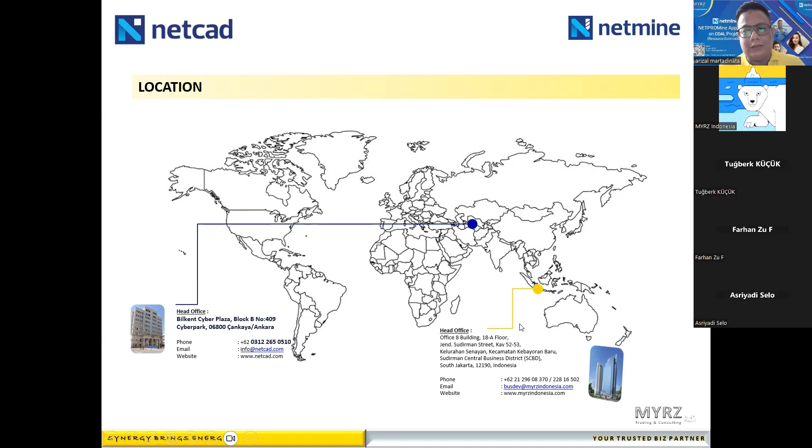Hello Tuğberk, can you say hello to participant? Sure, hi everyone, good morning. Yeah, morning. And then Khatijah.

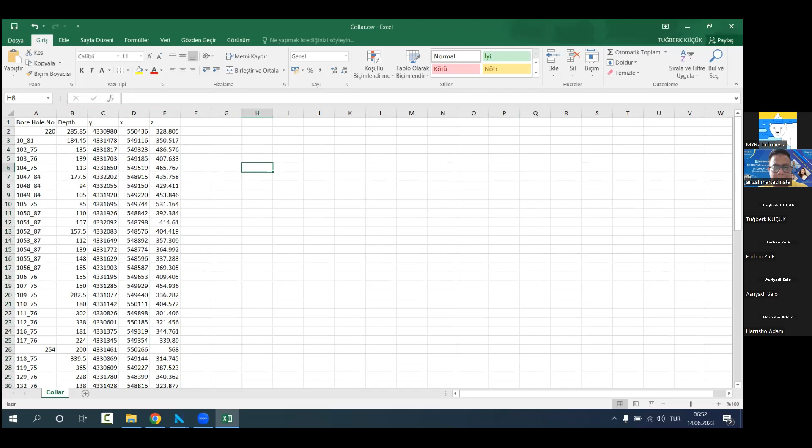First of all, the first step, the first layer that we have is borehole data. So we need to bring our borehole data. In the collar information, basically what we require is the name or number of the borehole, the depth information, and XYZ coordinates. So first, we are reading that information from a CSV file.

Okay, seems like it's matching correctly. If it didn't match, you can just select the proper field to make it match. So once we apply, we are going to create the borehole data.

We are going to bring the boreholes in here, and you can also see under the borehole data, now we have 66 boreholes, and we created their information card, let's say, the borehole information card. We are going to fill the rest of the information once we proceed, like lithology information, the angle information, and the raw sample information later on.

For the second thing, we are going to read the survey or angle information. According to the borehole name, we have dip and azimuth information, which shows those boreholes are vertical ones, so we don't have any different angle, but still we can read that file. Here it should match with the dip, and here it should match with the azimuth information. Okay, we applied.

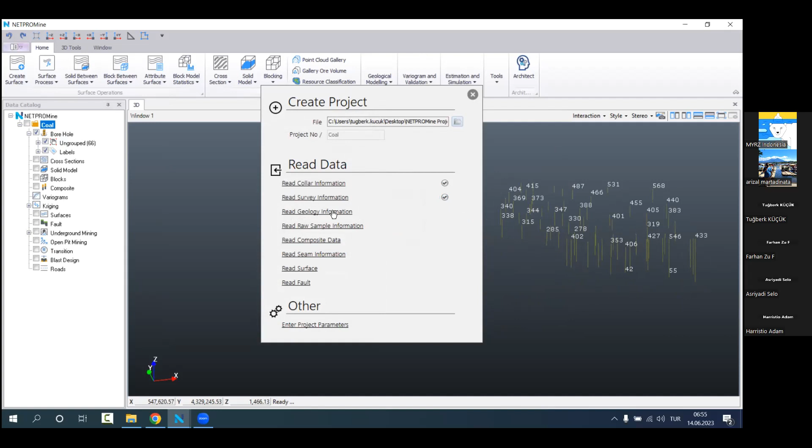In the meantime, you can understand that if the software accepts your information, it's going to be checked; otherwise, you might see some differences. There are two options basically: first, you can get a notification saying that information is not correct, etc. So you're going to get a note saying that there is something wrong. In that sample file, we are not going to have that issue.

For the borehole lithologies, we are repeating the name or number of the borehole, and according to the depth information, we have different lithologies. For example, it says in between 0 to 9.6 meters we have this lithology, and in between 9.6 to 10.3 we have KM3 lithology. So it goes to the end of the borehole, which is the final depth, and going there we have lots of different lithologies.

So now we are going to read or import that information. It's matching correctly, and we are going to apply.

Okay, so now we do have geology information too. In the raw sample information, once you click it, the software will tell you that you need to enter the attribute information, which is analyze information. You can go there, go into the project parameters, and type some attributes that we are going to work on.

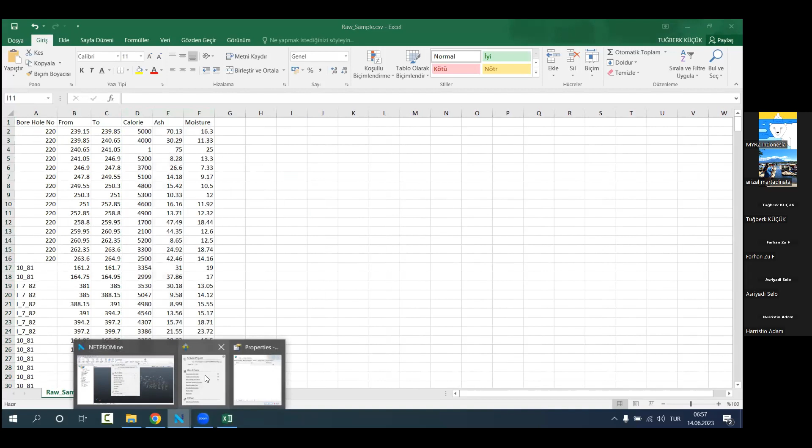So therefore, let's go to the properties. In the attributes, I will say calorie information, ash, and moisture information that I'm going to bring into the software. As a unit, I will select calorie. For ash and moisture, what I have is percentage information, percentage of ash and percentage of moisture. And I will click OK.

So now when you click read raw sample information, the software will allow you to match the information, from and to, and now calorie should match with the calorie, ash, and moisture. Okay, when we apply, we are going to bring that information into the software, and also into each borehole's information card, for example this one.

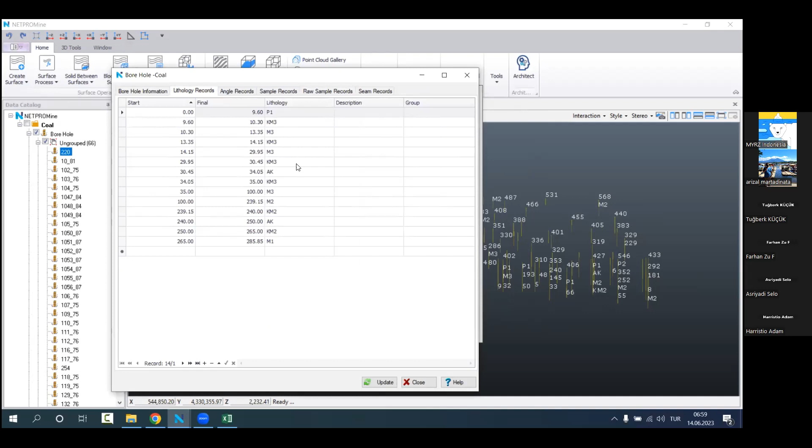In the raw sample section, you can see the calorie, ash, moisture part. In the lithology, you can see all of the different lithologies and the angle records. For hole dip, we do have -90, so we are quite aware of that. All right, so these four pieces of information are quite enough for starting a project.

If we have separate seam information, we can also read the seam information too. It's quite similar to lithology. Whenever we have seam level in between some depths, we can also bring that information into the software. So instead of lithology, maybe you can also use the seam, and you can see the seam information. Seam or vein, maybe you're familiar with the vein information.

All right, now we do have the borehole, so I would like to manage that data. A lot of different labels are on at the moment, so I will just leave the borehole number.

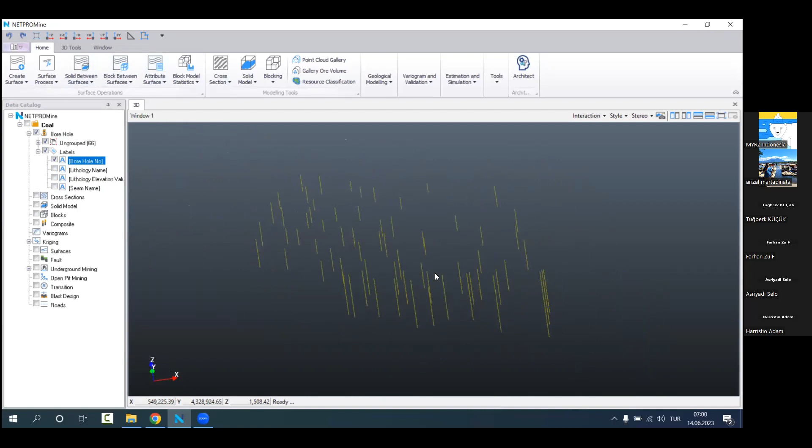Then the second thing, boreholes are looking a little bit thin, so I will change the diameter of the boreholes. From options, 3D settings, as a cylinder diameter, I will use 15. Visually, it will help me to see the boreholes thicker.

All right, the next thing I would like to do, let's go to the properties of the project, go to the lithology colors. Now I would like to differentiate the lithologies by assigning them different colors. In the meantime, the lithology that contains coal is this one.

Okay, KM2. So usually I make the lithology that I'm going to work on red. If you do that, basically you're going to see the levels that most likely contain coal. That red level contains coal information for me, but let's also give other colors to the other lithologies as well. So I will give light colors to the other lithologies, so it's not a problem to separate the red lithology from the others.

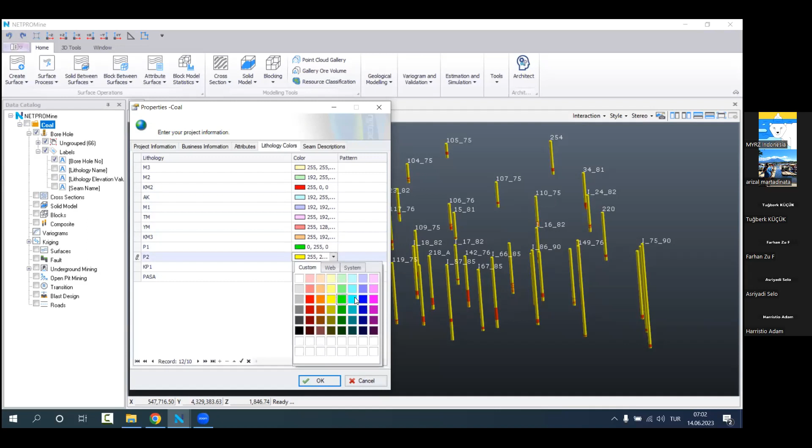Maybe like that. All right, the red one we can still see, or usually light colors. So this is helping me to understand what kind of lithologies I have at the moment.

And if I want, I can make some adjustments. For example, I can edit the borehole number label here. I can change its color. I can make it bold.

Or I can bring some new labels. Go into the label, add a label for numeric calorie information, for example. And again, let's make it like that.

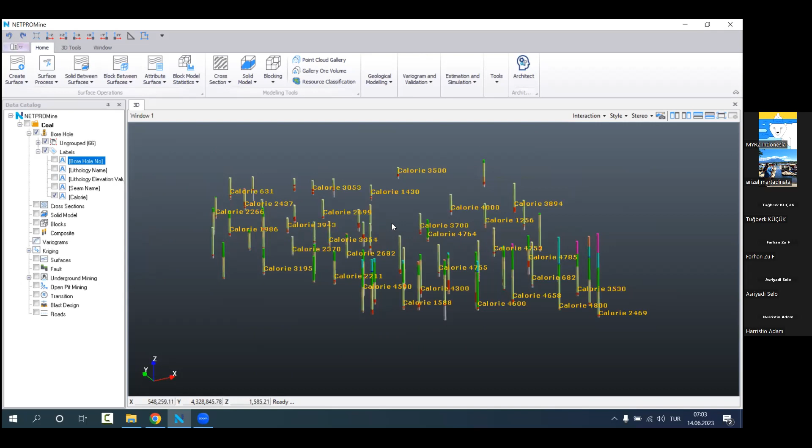So now, in different levels, I do have different calorie information as a label. So when we bring that calorie information as a label, it's quite hard to understand what we have as calorie and how the distribution looks like.

Therefore, we do have the raw sample displaying feature. In the raw sample display, you can select the attributes and make that attribute visible in some sort of a legend. And look, even if I close the boreholes, now I can see the levels that I do have, the calorie and different calorie information also.

So you might say that intervals don't tell me anything. I mean, why did we separate that in between 0 to 1369? Basically, the software just directly creates a legend in between minimum to maximum information. So our maximum calorie information is probably this one, 5,479. The software just splits that information into 4 pieces.

But I can go to the thematic part. I can edit by using a new numeric range, so the slot spaces are going to be user defined.

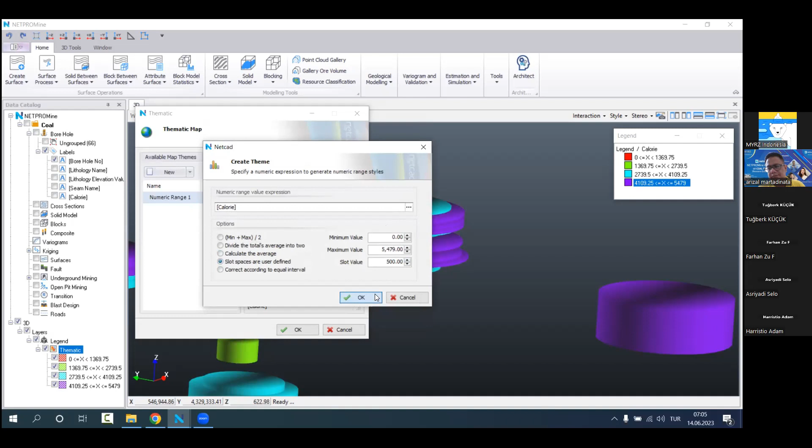I will select the calorie information now, and according to that information, I'm going to define the slot values. It can start from 0 minimum value, but I would like to select 500 as a slot value, so it's going to separate that information into 11 pieces.

Now, the pinky color is the highest calorie that we have, and the purple one is quite high. I can get some understanding of the levels. I have high calorie content in this region, and low quality material here usually. So it's in between 1500 to 2500 over here, and in here it's like in between 4000 to 5000. So this is the information that I have.

Let's turn back to the boreholes. What other statistical information I can get from the software is one of them. By right-clicking on the project file, you can get length statistics.

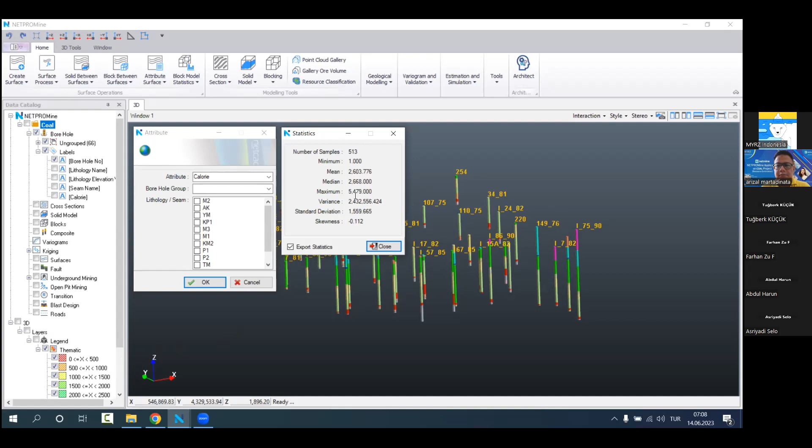The other thing we can get statistics about is attributes. So now I would like to get some statistic about calorie attributes. As you can see here, the maximum calorie content is 5479. Did it surprise us? No, because we already saw that it was the highest value when we were editing the legends. So the highest one is 5479 calorie, and average calorie in that sample is 2600. So this is another information that we can get.

Also, we can create a histogram graph. Let's say calorie - so this is the distribution of the calorie information. Average 2600, but most likely, yeah, we do have a lot of material here, but we also have a quite good amount of material in the high quality part.

In a histogram graph, we can also see the distribution. We don't have any bullseye point. Usually it happens in the metallic samples - even though you do have the distribution in some small part, we do have high content or high calorie, but it's just a straight distribution. Although we do have really low content material also. Okay, other statistics that we can get.

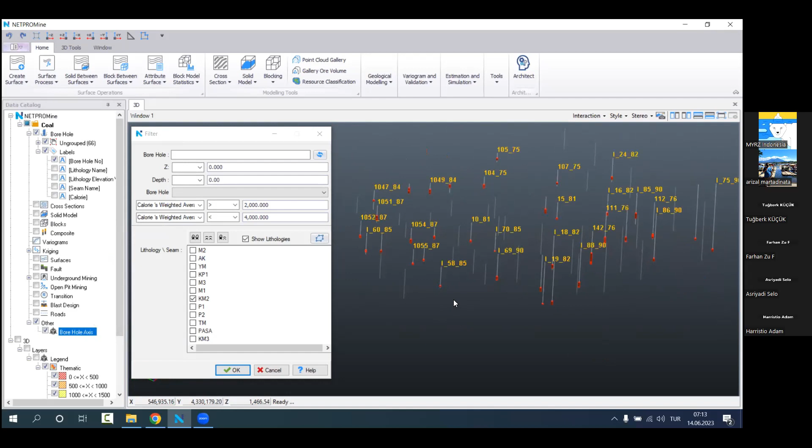Basically, you can use all of the filters together, but let's reset the information instead, and separate that boreholes by drawing an area.

Now I'm going to draw an area and differentiate the boreholes. In order to make a drawing properly, you need to close the snap features, because if you'd like to use the 3D space, you don't need that. Otherwise the software will try to catch something when you have snap on.

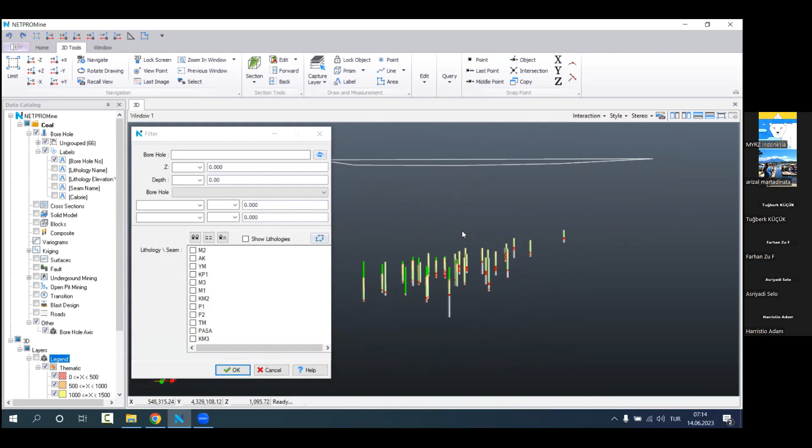So, okay, this is the part that I would like to filter. When I click OK, I will filter those boreholes. Originally I do have 66 different boreholes, but now when I filter, you can see we don't have 66 boreholes here. And when you have a filter on, the icon of the borehole will turn blue, so you know a filter is on the boreholes.

If you would like to manage those boreholes separately, you can also create a new group. Let's separate that as zone A and zone B, for example, or zone 1.

So now I do have a different borehole group called zone 1, and I can make a selection of these boreholes manually, or you can right click on the ungrouped, then right click and send those boreholes to zone 1.

Now when we remove the filter, we can see that in zone 1 we have 34 different boreholes, and in the main ungrouped one we have 32. So if I check or uncheck, I can see that. The thing I would like to mention here is, as long as you have the groups and separate the information, you can also get reports specifically for the boreholes visible on the screen.

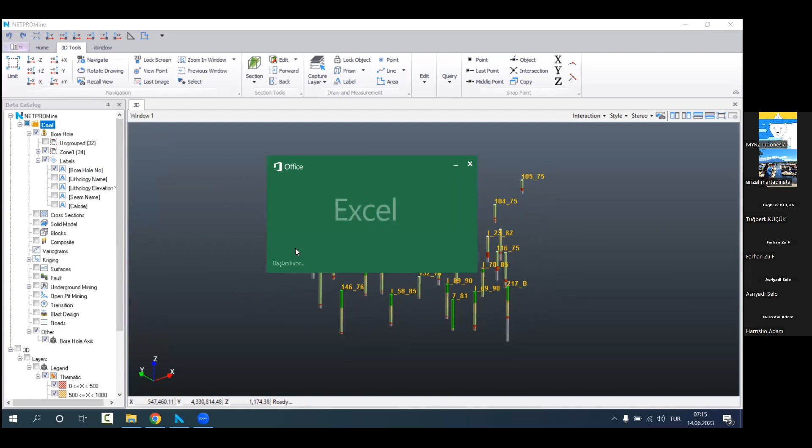So for example, now we are seeing the boreholes that are in zone 1. If I get a report for the list of boreholes, I'm going to see 34 boreholes. Okay, it's 34 different boreholes.

Or any other information, like a report, raw sample. For every level, it's showing the attribute values, depth in between, calorie information, and the distribution. But we have 34 different boreholes here, not the whole set.

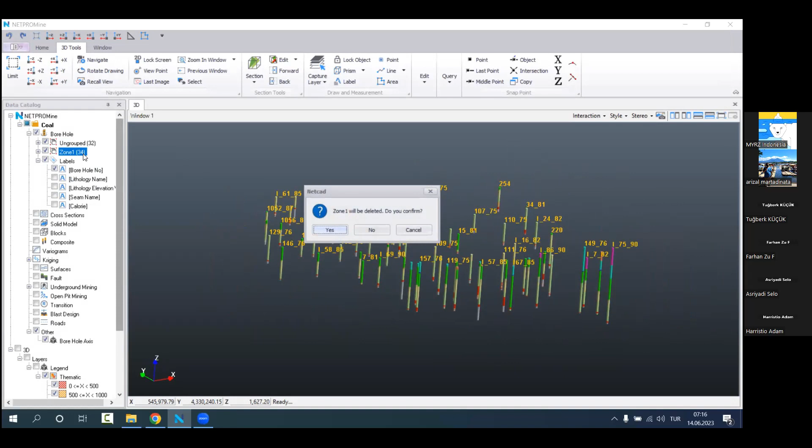When you would like to get a report, just keep that in mind. If you would like to get a separate report, you can use that. If you delete the group you created, you don't lose any data. All of the boreholes just move back into the ungrouped file.

So more or less, we're quite okay with analyzing the borehole information. We do have some further operations though, which is resource classification and the Voronoi analysis. I would also like to talk about that, because these are features that came to us from our clients.

These Voronoi features, for example, if you would like to see some information in a specific area, you can use that Voronoi feature. I will talk about how. So now I would like to see, let's say, an area, drawing an area first.

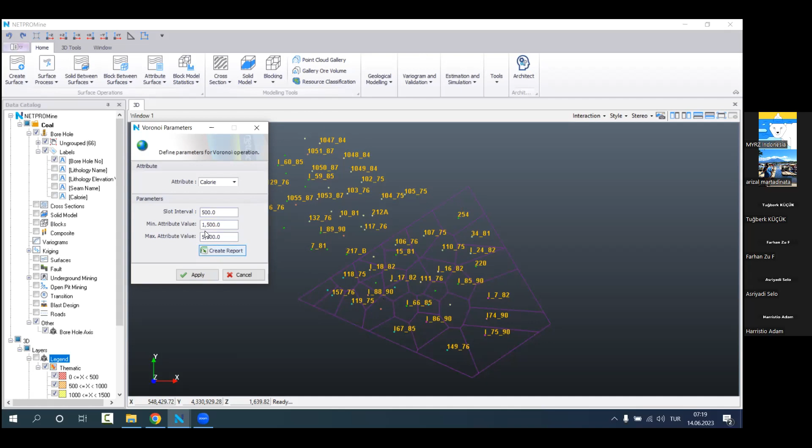For every 500 calorie, it starts with 1,500. If you remember, that region was actually high, so we don't have lower content here. Therefore, I think that's why it's starting with 1,500. So now it shows me the boreholes that are inside the range.

For example, borehole names 112, 76, 119, 75 - these boreholes are inside this range, 1,500 to 2,000. And the area information of these boreholes and the volume information of these boreholes - so area and volume definitions.

What do we mean by area and volume definitions? Basically, it does quite simple reserve estimation. As you can see, these small areas here - it also shows the areas we have for this range, okay?

We do have 4 different boreholes in here, and these 4 different boreholes have a weighted average calorie in between 1,500 to 2,000. Or this one, okay, 3 of them, this one. So the area information is actually the total area those boreholes have - this area, this area, this area, and this area.

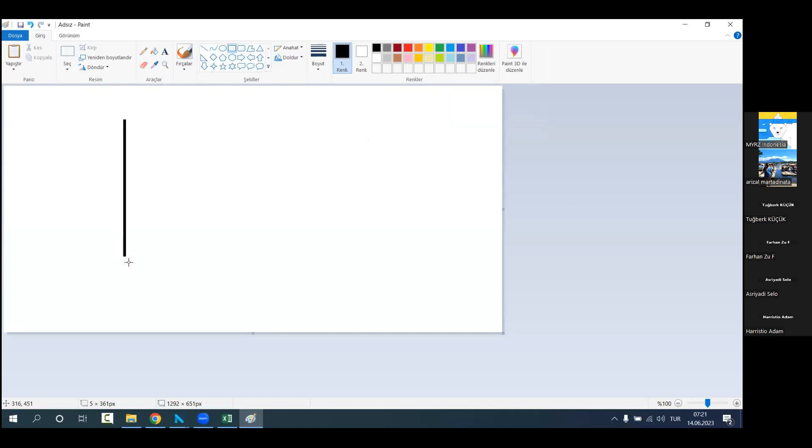So I will get help from an old friend. Okay, I also would like to explain a little bit what it does.

So let's say we have some calorie information, 2,000, and here we have 1,000. According to the levels, we are going to have weighted average calorie information, and if we say that this level and this level are equal, then we are going to have 1,500 calorie.

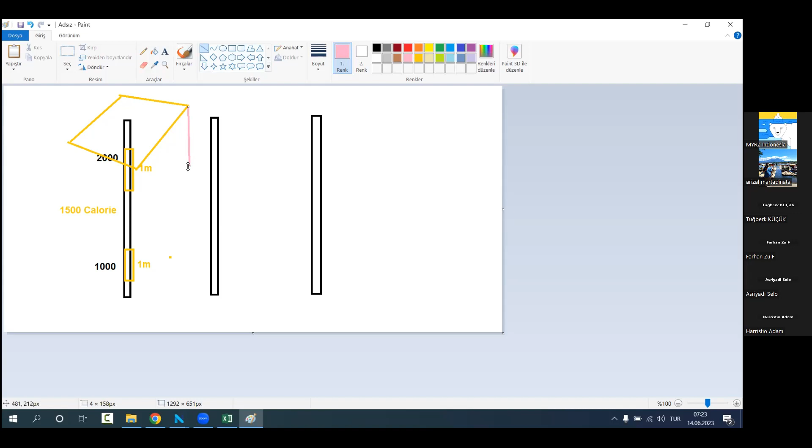It's a weighted average. On the borehole, we do have that amount of calorie. Let's say it's 1 meter, and it is also 1 meter. With the Voronoi, we are basically finding the impact area of the borehole. So let's think that this is the impact area of the borehole. The potential volume as a reserve here is going to be 2 meters, this area, and 1,500 calorie. So basically, if we make a volume here, 1 and 1, so 2 meter length, I'm going to have like this. Its potential volume for this borehole and this impact area.

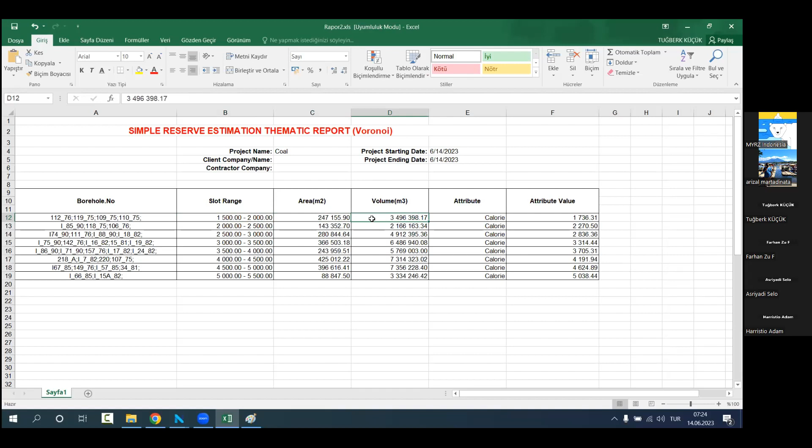For the others, it also calculates. So if this one also has weighted average 1,500, it calculates its volume too. But maybe we have 1 meter thickness in here. Maybe, I don't know, just an assumption. So we might say that we do have 1 meter thickness. So this one, and maybe this one, is going to be included in the 1,500 to 2,000 slot range, and their total area and their total volume will be this. But like I said, this is a simple calculation for quick usage. At least you can get an idea what kind of potential reserve that I might have.

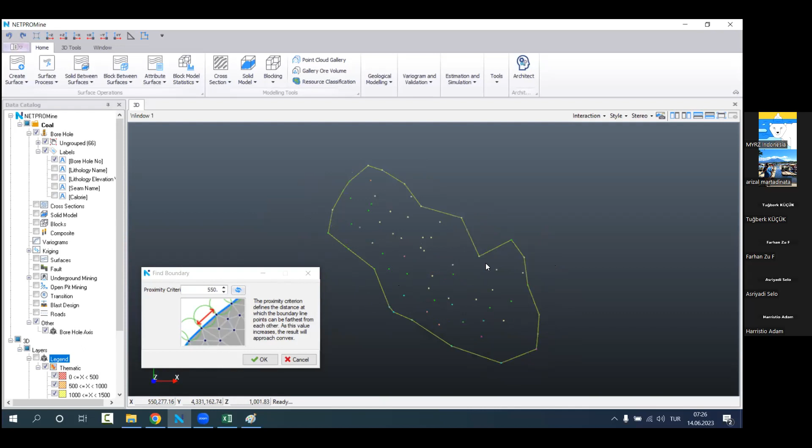You can draw any kind of area, and then you can get the potential reserve information according to those calculations. Don't forget that. So another feature I would like to talk about is the borehole limit. When we use the borehole limit, we are actually finding a boundary that will cover all of the boreholes. For example, this one. If you increase the number, the edges are not going to be sharp, and maybe it's going to take more material over here. So I think this one is quite okay.

So this could be the boundary that I would like to use. You can change the proximity criteria, you can adjust the boundary, you might say that in this region I'm going to work. It is totally fine and acceptable. So let's say we do have that kind of boundary, and also average distance between boreholes, it's kind of like 200 meters at least. So what I would like to do is go to the expand feature, and I will expand this distance a little bit like that, 100 meters, I expand that boundary.

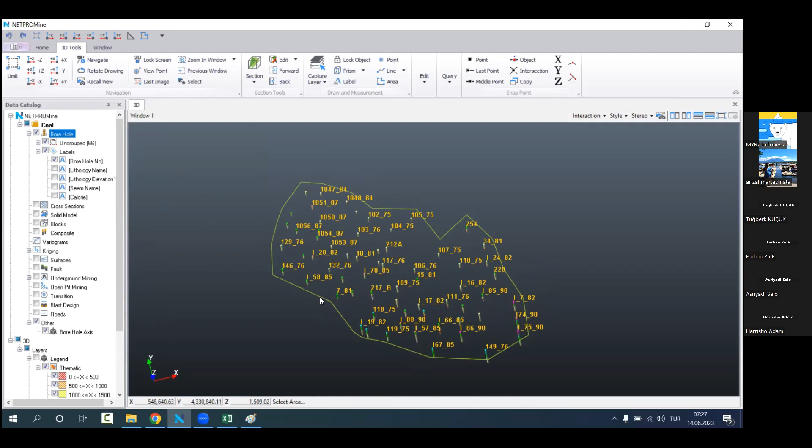And I can also use this one to make some Voronoi calculations. So the minimum is different now. By selecting all of the boreholes now, I'm going to create a report. So, okay, this one is a little bit different than the other one. We do have different volume information here, and we do have different volume information here. But this time we used all of the borehole data.

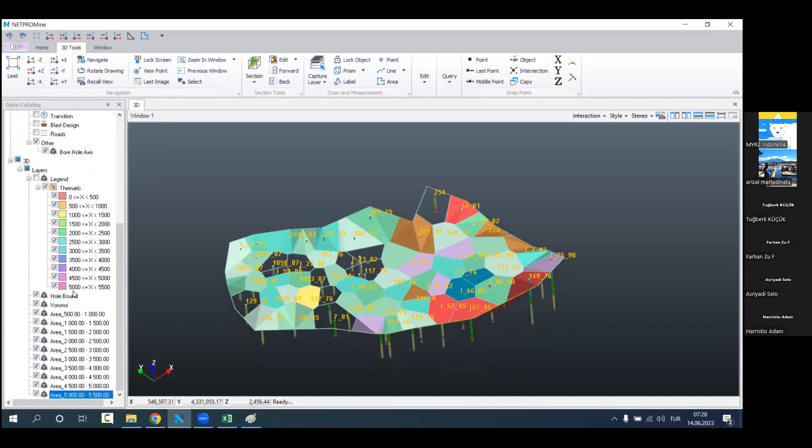But of course, that will work as long as you have calorie information inside the boreholes. So if you don't have some information in some certain levels, for example, this one was empty because we don't have calorie information in this one. Therefore, we would like to go further in that coal project, and we would like to create a solid model, more likely, to make some calculations for potential reserve. So while we are moving forward to the solid model, we do have two options: one of them is implicit modeling, the other one is explicit modeling, basically.

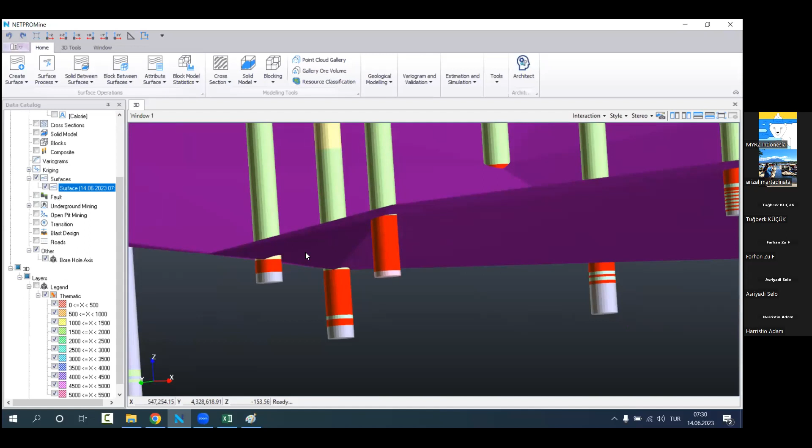But instead of drawing cross sections, in that type of data set, you can create surfaces, basically. Let's create a vein or lithology surface. So we are going to use KM2 as a lithology, and the top side of the KM2, we are going to create a surface. It says select limit if you would like to, so I will select this bound. According to this bound, it created my surface, and also it used the top side of the lithology, the KM lithology here.

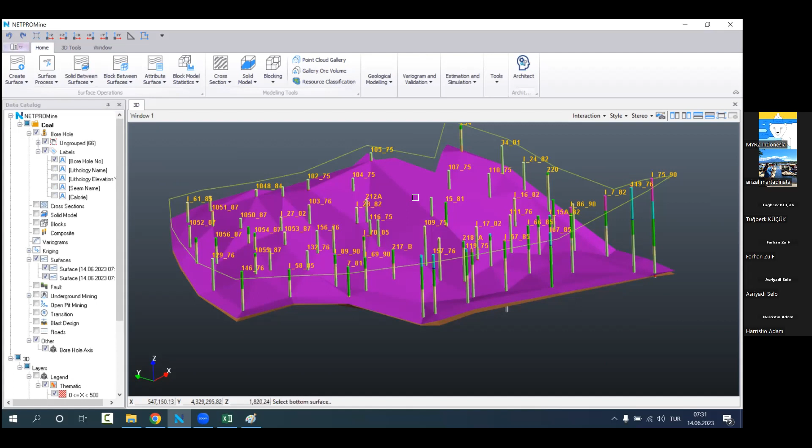Now we can also do that for the bottom side. Select the limit, which I will use this one. So the bound actually worked in this case, right? So this is the levels and the surfaces that I potentially might have a coal, basically. And if you would like to get a solid model, an explicit solid model, by using those surfaces, you will use this feature: solid between surfaces. Just click on it, solid model, select the top surface, select the bottom surface, that's here, and select the limit.

Okay, we created a solid model and it says 77 million meter cubic volume we have.

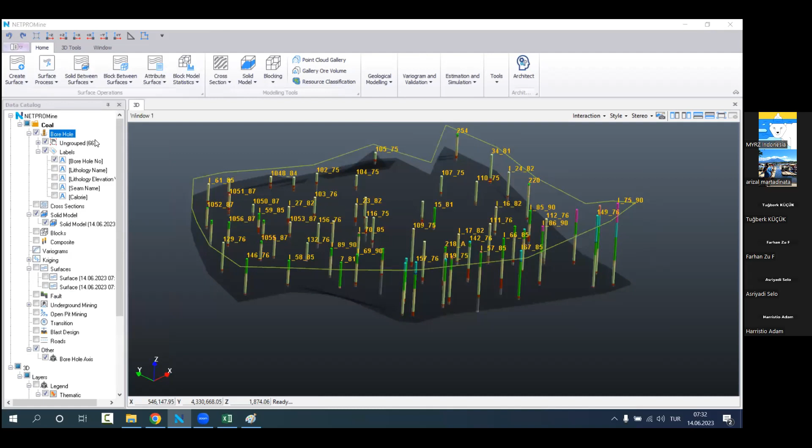So this is the potential solid that we might have, all according to these seams. From style operations, you can give some color, let's give it a black color and then give it a transparency. It is a coal at the end. And let's filter the borehole and show me only KM2 lithology.

So in NETPROMine, there are lots of ways that you can use to analyze the potential reserve, like Voronoi application, you can make some quick calculations, you can create a volume in between surfaces, you can also use this resource classification feature too. Okay, well, that works a little bit different.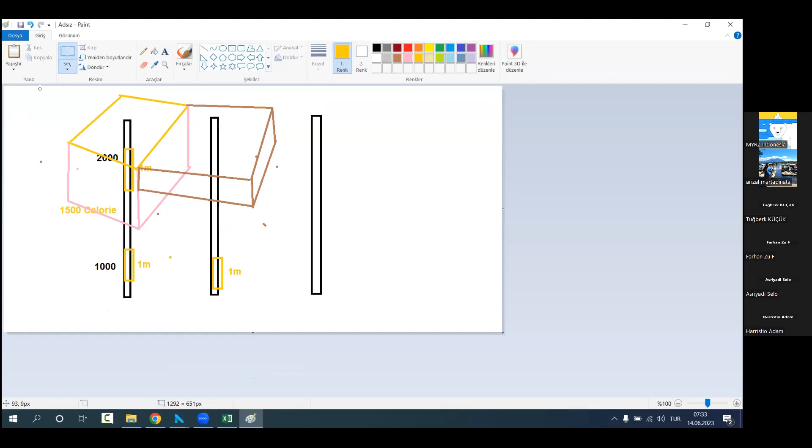So in the resource classification, basically, we are extending the boundary and we are finding measured, indicated, inferred areas. So let me also explain this one. If we have a couple of boreholes like that, so according to the radiuses that we defined here, measured, indicated, and inferred radiuses, it basically gives some radius around the borehole.

Let's draw this. And those areas are becoming actually their measured, indicated, and inferred areas and volumes. So we are basically combining.

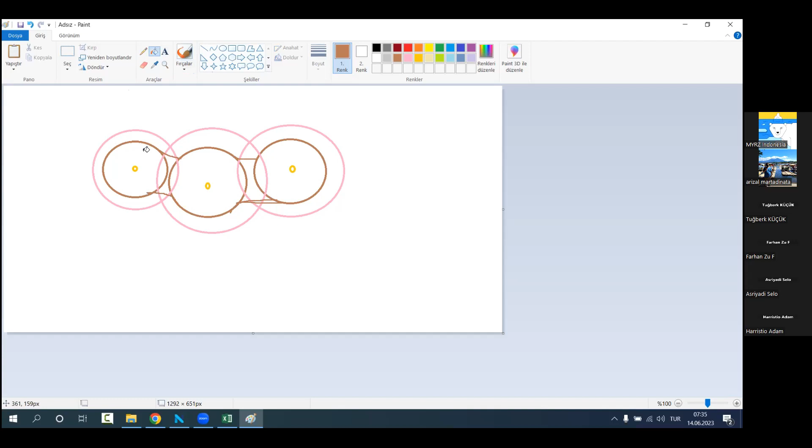Okay, let's say the first one, so this one is going to be its measured area, and according to the thickness level, we are also going to make some volume calculations. And the second one, this one, by also including this, actually, it's going to become its indicated area. And the other one, maybe let's say a little bit larger than that, it's going to be its inferred area.

So let's see how software does that operation as well. So when you use that button over here, it will give you the average distance between boreholes, okay? So average distance between the boreholes is already 266, so I suggest using some radiuses more than that.

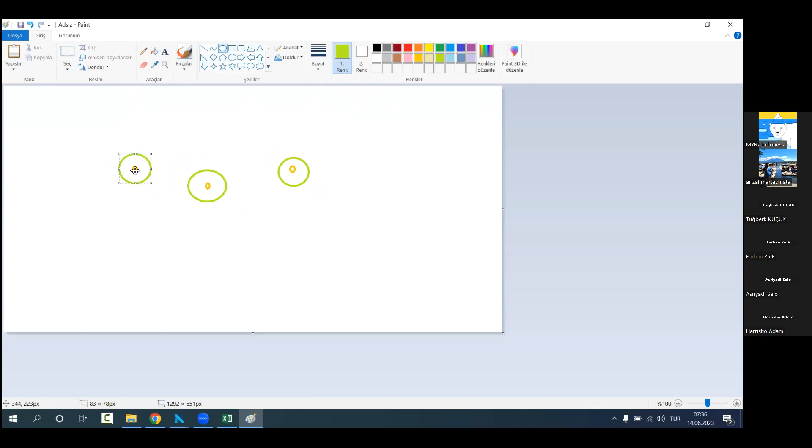Otherwise, when you would like to make a volume calculation, it will look like this. Let me show you. Let's turn back to the frame number 1. Like this, basically. And if you give even smaller areas, it is not going to even combine the boreholes, and the potential volume that it's calculating will look like this.

Okay, a volume for this borehole, a volume for this borehole. But we do have a continuous structure, basically. We do have those boreholes, and we do have some continuous structure, most likely, and therefore I don't recommend giving so small areas.

300, 400, and 500 calculations we are going to make. So let's apply, it is going to create measured, indicated, and inferred areas.

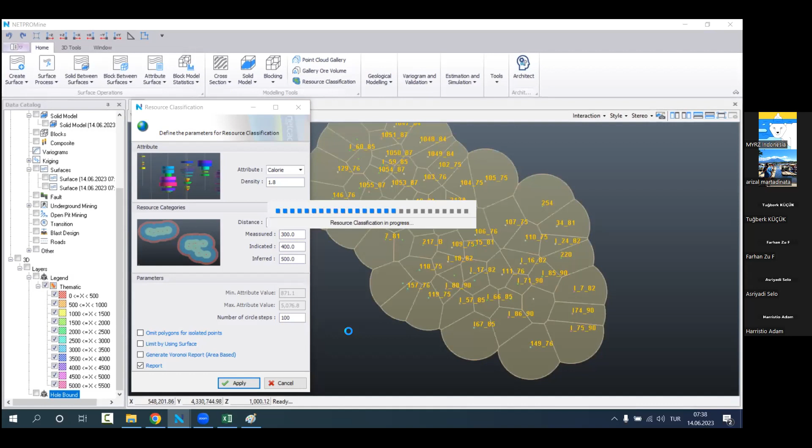All right, so we do have a different areas, and area information is like 4 million meters square, 4.7 million meters square, and 5.6-ish million meters square. And the volume information is just multiplying the effective thickness with the area. So the depth multiplying with the area will give us the volume.

So it says potential volume 62,074,000. Actually, what was the volume of our solid? I think we have something close here. Okay, 77.542. Okay, but we did make a lithological model, and that works actually with attributes, so it works with calorie levels instead of seam levels. It's a little bit different.

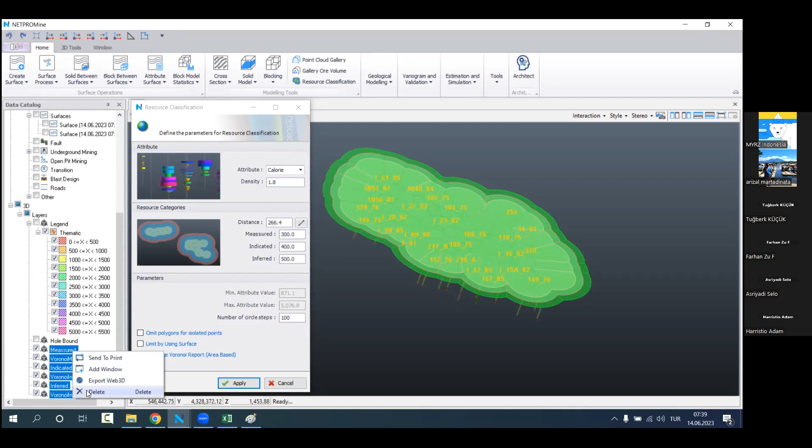And also, while we can create those reports like that, we can also create a report in Voronoi format too, according to every borehole.

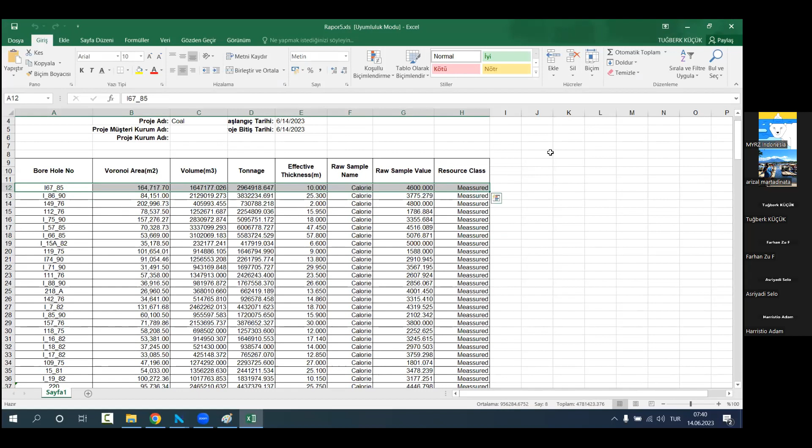Okay, so for this borehole, it has that amount of area that comes from Voronoi area and the potential volume, effective thickness of that borehole, lithological depth, basically. And then we are repeating. Why? Because the first area has...

First area has that amount, the second area is a little larger one, and the third area is different. So repeating the borehole but changing the area information all the time will give us different measurements as well. So this is another method that we can use to make some analysis, of course.

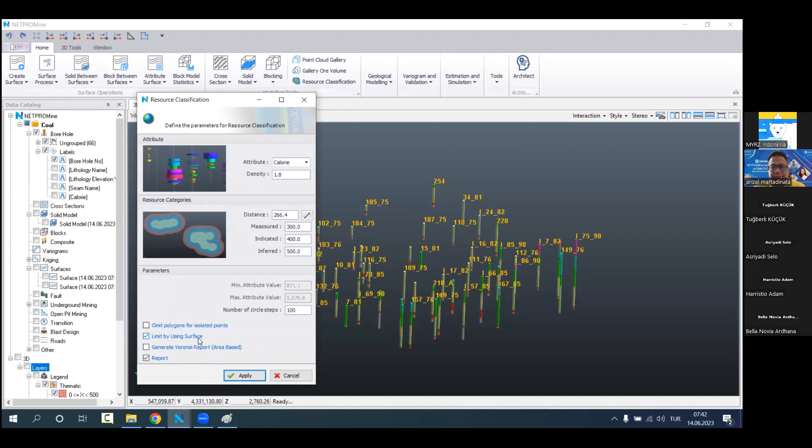What else? Actually, let's also make something like not generating a Voronoi report, but we can also use surface as a limit to that operation. So if you remember, we had those surfaces, so it's the upper surface, it's the lower surface. We can also limit the information.

Now, while it's calculating the effective thicknesses, it will use those surfaces as a boundary too.

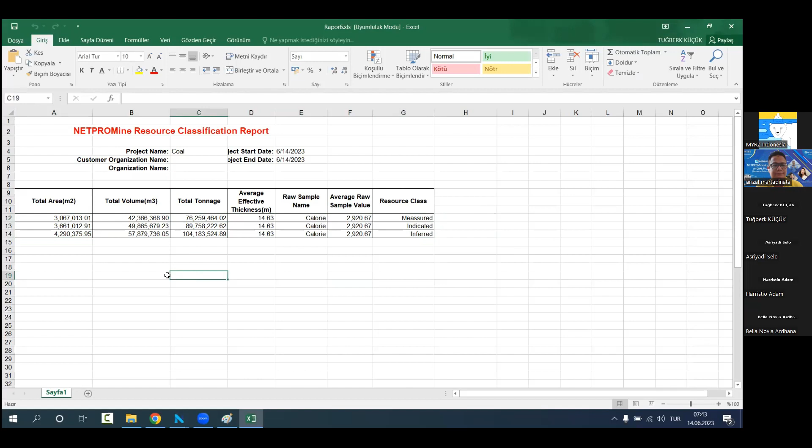The other thing that we can do in the software is using implicit modeling. If you want to, you can also create that kind of solids with implicit features as well. But usually it's not working well for that type of minerals, that type of structures. But for showing you the way how we can do it, I can show you.

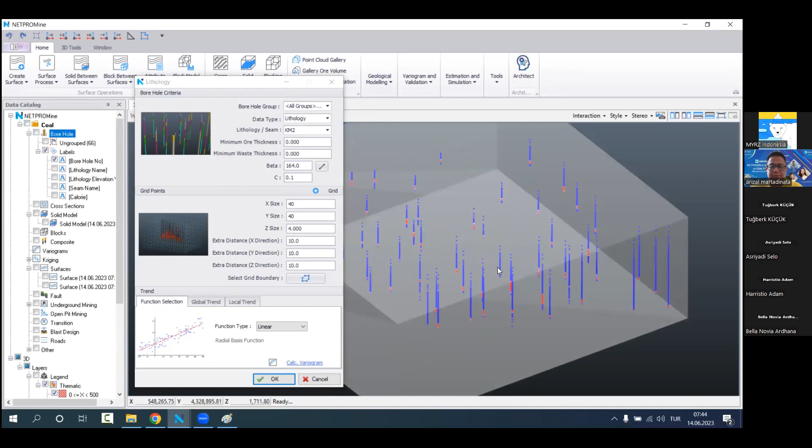So I will use the lithology information, and as a lithology, I will use KM2. First, we are going to create some distance function points, which basically creates minus values on the borehole info and the lithology info. So grid - these levels, these minus points, are basically where we do have the KM2 lithology. Now the software will calculate which points could be minus points.

In this part, you need to make some arrangements to the beta and C value. So the distribution, the production of the points will change. Let me show you - as in this example, it can be understood, but let's draw boreholes once again.

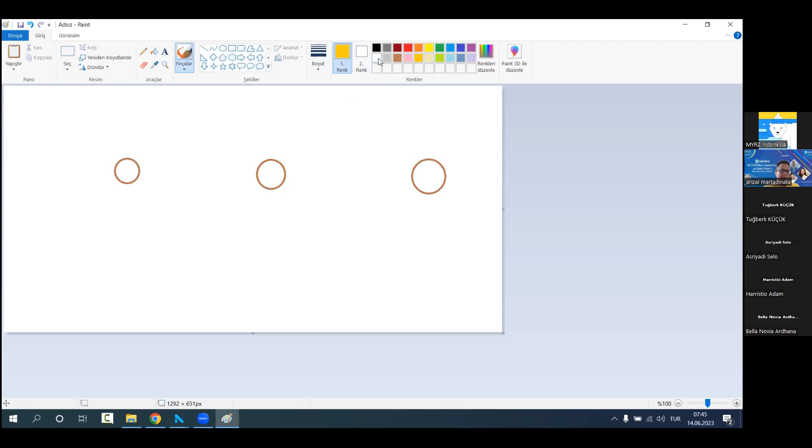While we are arranging the beta and C values, the software basically creates minus points. Let's say this is the borehole, so minus points in here - let's say -1, -2, -2, -1. So the minus points are actually our lithological levels. Let's also make that levels like this. So at the end...

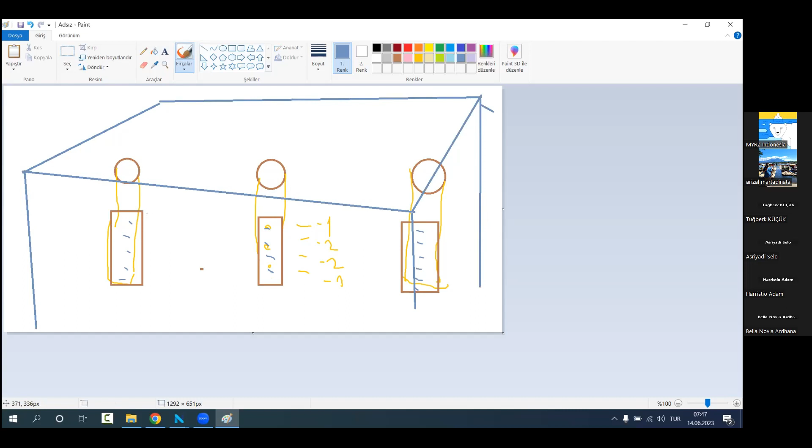Software creates RBF points. First it defines the potential minus points on the boreholes according to the lithology or seam or grade information, even according to calorie - you can also make some models. And then it creates potential minus points inside the grid. Remember, we do have a big grid - this is actually what it's for. So inside the grid, it makes some calculations, and according to the calculations, it assigns some values and fills that part.

And then it combines the information. According to beta value - if you didn't give any beta value, let's say you used 0, the software basically creates points around this one. It doesn't go further, it doesn't combine the lithologies. So it says you do have that kind of a solid, that kind of a solid, and that kind of a solid. So therefore, you need to do some adjustments in the beta value.

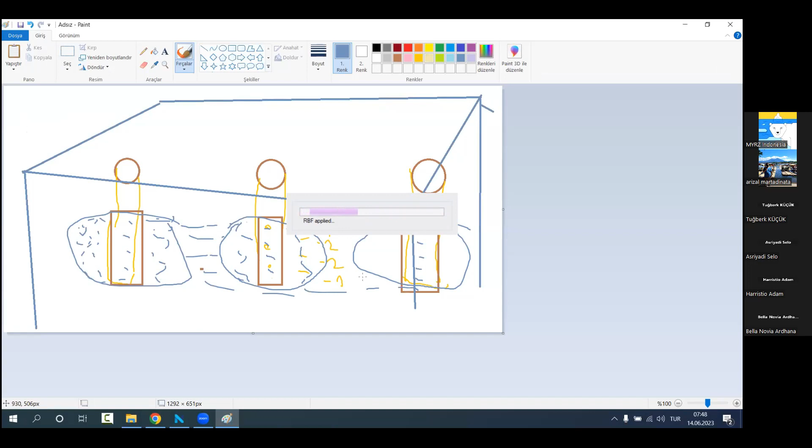And then we are producing a model. Basically, RBF points are getting calculated, like these points, right? It's a little bit distant from starting point to the end, so it might take a little bit long to calculate all of the RBF points.

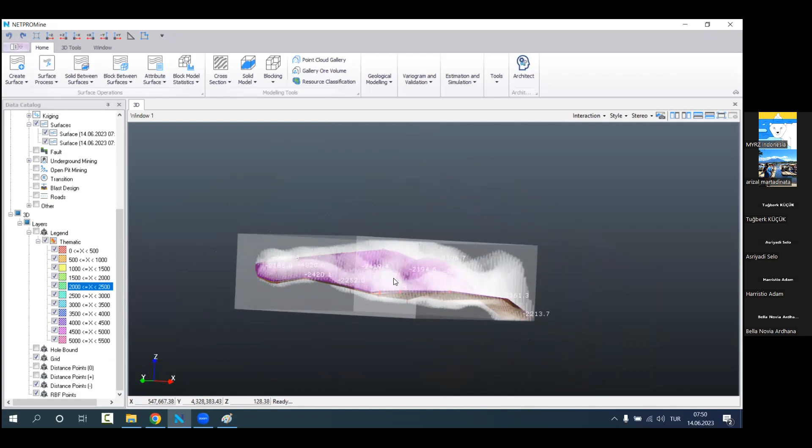Okay, the points that we generated, even too much, so we need to make some adjustments in beta and C values, most likely. But you know what - we can also filter the potential produced model with these surfaces that I have here. Look, if I create a solid model by using those RBF, and if I filter that solid by using my surfaces, again, it's quite okay for me to create a lithological model.

So instead of finding the best suitable RBF points, I'm just helping the software so that I can easily create the potential lithologic model by using the implicit model. So in the geological model, if you produce a model without doing anything...

Let's check one. I will create one big solid because the solid model that we are going to create is just going to cover all of the RBF points. So again, we do have a lot of different points, therefore it might take a little bit.

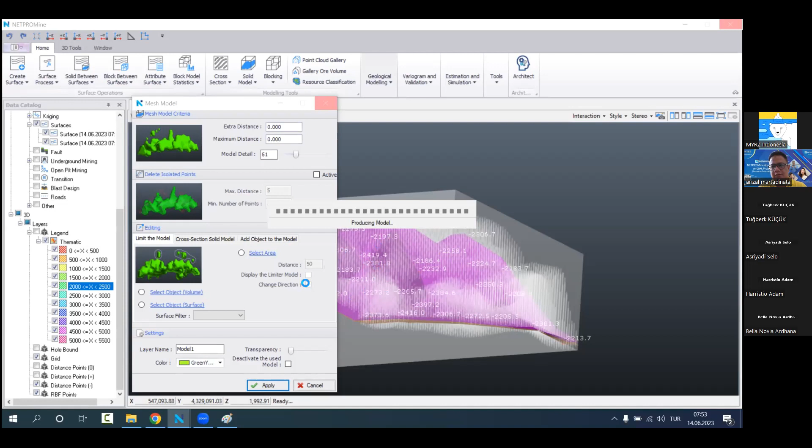So let's say we divided before as a zone 1 and zone 2, right? So you can also create a zone 1 model, and then you can create the second model as well. So, okay, it doesn't matter how it looks, because I know that it's just trying to cover all of the RBF points. And the next thing that I'm going to do is just use the surface filter into that solid.

Look, now I will introduce those two surfaces to the software. As a surface filter, now I'm going to use between surfaces. I will select surface 1 and surface 2, right click. So now I introduce those surfaces to the software. Now produce another implicit - okay, let's make it black again, give some transparency.

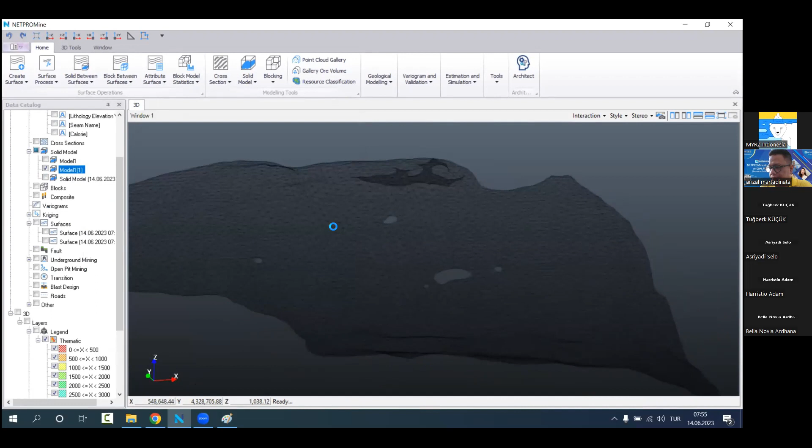Next step is going to be actually creating a block model. Either you came here from implicit modeling or explicit modeling, it doesn't matter, as long as you define some block settings. Here in this sample, I will use 20 meters and 4 meter.

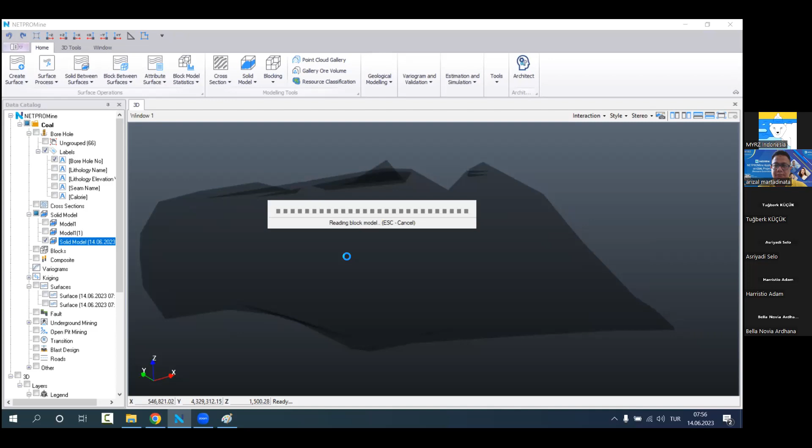Okay, maybe for this one. Maybe for this one, okay. Blocking 20, 20, 4. So in the borehole, we do have analyze values, but in the solid, we just have the solid. We don't have any attribute information. Why we are making a block model is because we would like to separate that solid information into smaller pieces.

Like that. And then we are going to assign borehole analyze values into the blocks, into every single block. And there are a couple of ways we can do it. Let's create another block. Copy, basically, I take a copy of this block too. So this one is a copy, right? The same block. So the first thing, the easiest one, is just create a composite.

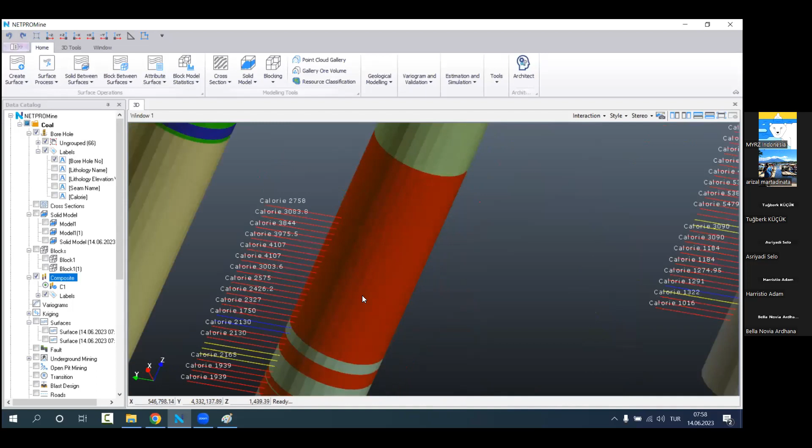With that, basically, we are making a 1 meter distribution of the boreholes. Let me show you. When we make a composite display or calorie, okay, here you can see the distribution.

So every 1 meter, we distributed that information into different calorie levels. And then with that distribution, we are going to assign those values into blocks. So wherever the block is, it will get information from that level. But there are also a couple of different assigning methods as well, like nearest neighbor, inverse distance, etc.

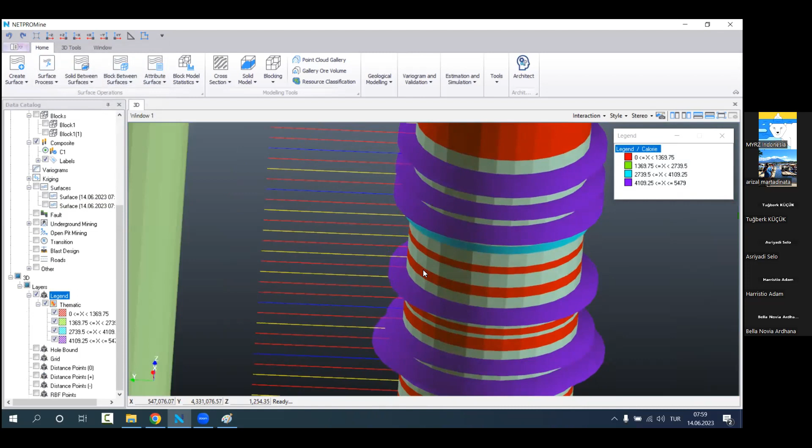I just wanted to show how it's distributed. A raw sample display. Maybe it will be much more meaningful now. So, okay, we do have the whole lithology, but in those levels, we do have a calorie actually. Also in here, look, that yellow ones actually doesn't have any information, but in here, it also shows the calorie.

Okay, let's close that one. Let's remove the filter. Turn back to our block model. Now there's one simple estimation method, which is nearest neighbor, and you can simply select the attribute, and according to the nearest borehole, it will assign some values.

Okay, but you can see some clusters in here. Basically, it just assigns values to the blocks. Basically, blocks getting value from the nearest boreholes. Therefore, you can see that clusters.

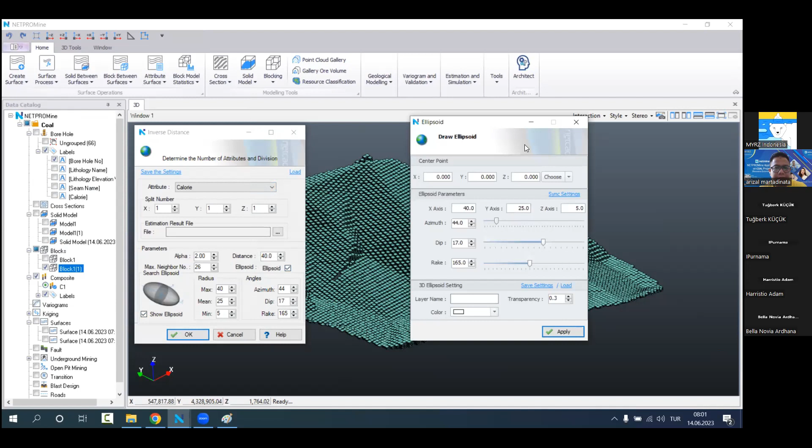Okay. There's another detailed method, which is inverse distance estimation. Now I'm going to do that. So for the calorie info, now I'm going to create an ellipsoid. I will choose the center. Basically, it just recognizes the block model when we choose the center.

And I will create an ellipsoid layer, and I will make that ellipsoid blue. I will type here some ellipsoid parameters and click apply. Okay, it creates an ellipsoid. If you would like to see the ellipsoid even better, you can give some transparency.

To the block model, so now you can adjust the angle information of the ellipsoids. So like, oh, it's actually, besides from azimuth, from minus Z, I just adjusted. It seems quite fine. Maybe a little bit like that also, right?

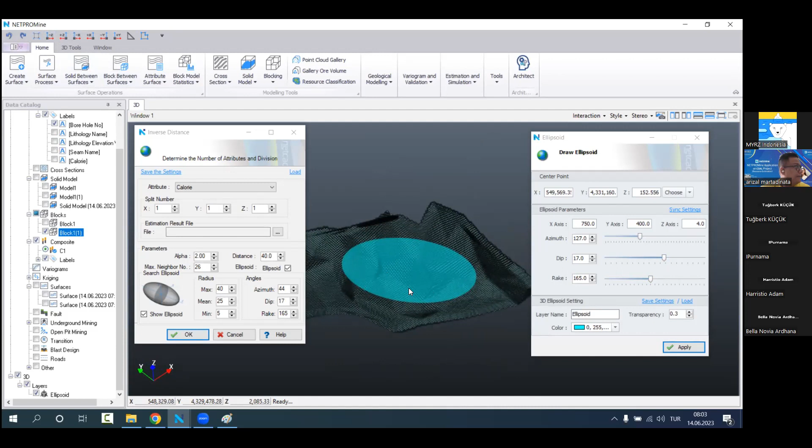So I want that ellipsoid to follow the calorie's pattern here. And according to those levels, that ellipsoid shape, it's going to assign some values. And when I say synchronize settings, I will get ellipsoid settings here.

Let's make 500. And what it does when we have the ellipsoid and when we use the inverse distance method. So regular method, let's say we do have two blocks here, okay? So the regular nearest neighbor method actually gets the attribute information.

Let's say calorie 1500, calorie 2000, or 2500, for example. So when we use the nearest neighbor, basically those blocks get information from the nearest boreholes directly.

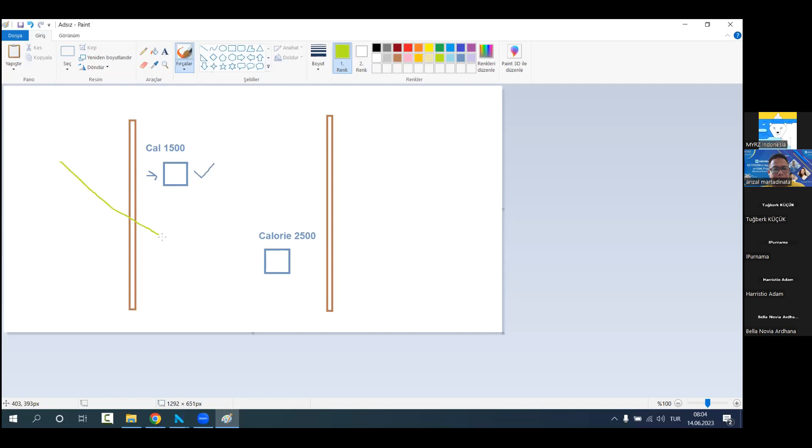But when we use the inverse distance, and especially that ellipsoid, we are gathering information inside the ellipsoid like this, okay? So we are going to assign some values into the block that we have in the center of an ellipsoid. So the ellipsoid will gather information from this level. Remember, we also distributed the calorie information, right? So it will gather information from those levels, and it will gather information from these levels.

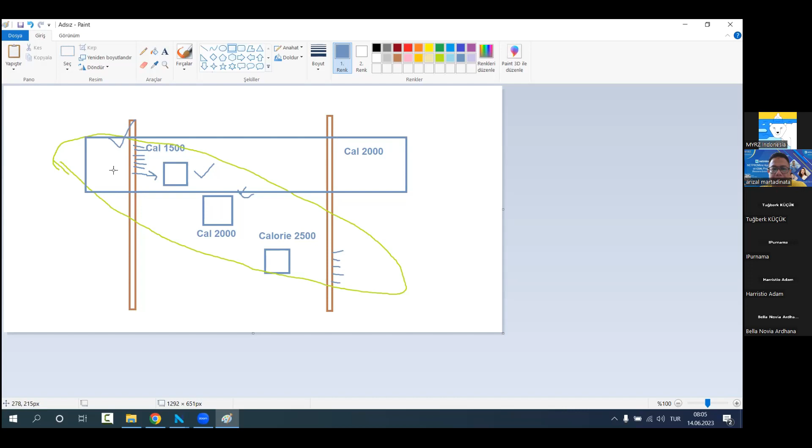And it will decide which calorie it should be assigned. So more likely it's going to be calorie 2000, right? But if we had calorie 2000 over here, nearest neighbor would have done this calculation. Doesn't care about the angle and the pattern of the ore body. It would just take that information in this level to assign some information to this block.

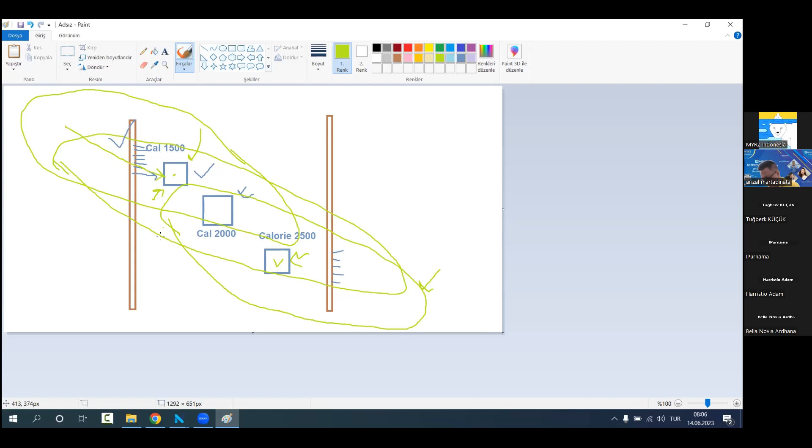So with ellipsoid, actually, we are just making some adjustments and getting information inside the ellipsoid. And this ellipsoid is not only one. Okay, let's say we would like to calculate the calorie value of this one. So the ellipsoid actually visits every block and gathers information for each block, one by one. For this one, for example, a different ellipsoid. So the ellipsoid visits every block's center and gathers information inside the ellipsoid and makes an assignment to the block. So this is the logic.

Okay, let's do the distribution now.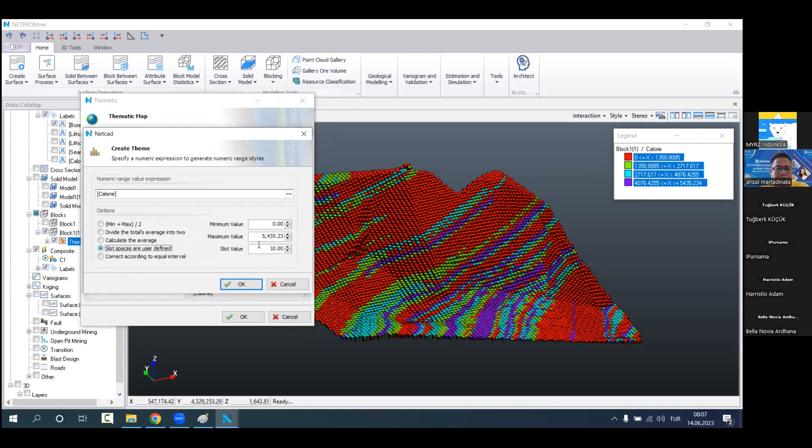Again, we can make some adjustments to the legend. Let's edit according to numeric range of calorie, with 500 slots, so 11 pieces again. All right, so basically this is how it looks like.

If you would like to get a solid model after this, you can also create an attribute solid model, which means you can create a solid by using some higher calorie levels, let's say 1000.

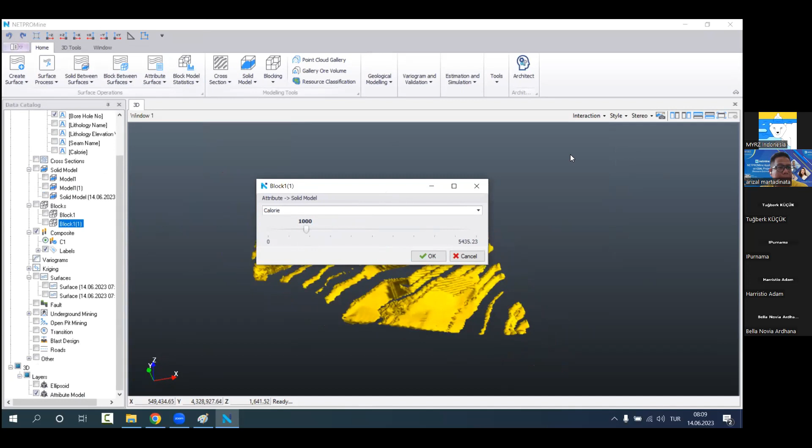So this is the solid that we have more than 1000 calorie here. Let's make it, let's say, 4000, just wondering. Okay, this is the part that we have more than 4000 calorie, the right side.

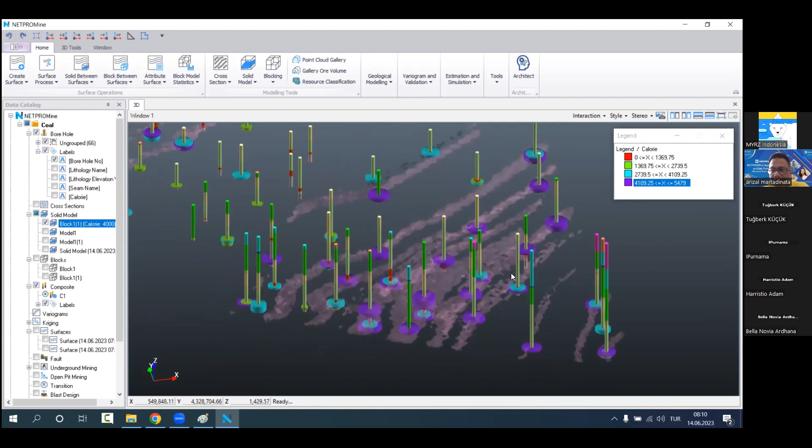If you remember our raw sample display, look, the purple ones are in the range of 4,000 to 5,400. So it is a quite good distribution, right? It's just catching exactly where we have around more than 4,000, and it doesn't bypass those levels too.

It's a small slice, but we are getting here 4,000 calorie. Also the block is the same as well. So it's a quite good distribution that we made here.

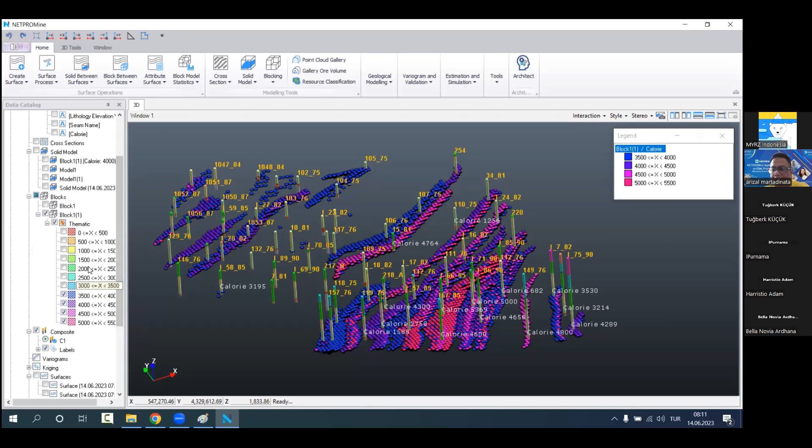And from the block, now you can get reports, the block reports. Density 1.8, let's say.

So this is the total volume that we have, it was around 75 million also, yeah. And as tonnage, because I give 1.8 density, it's just multiplied as tonnage, we have that amount of material.

So in every range, how much material we have, we can see it.

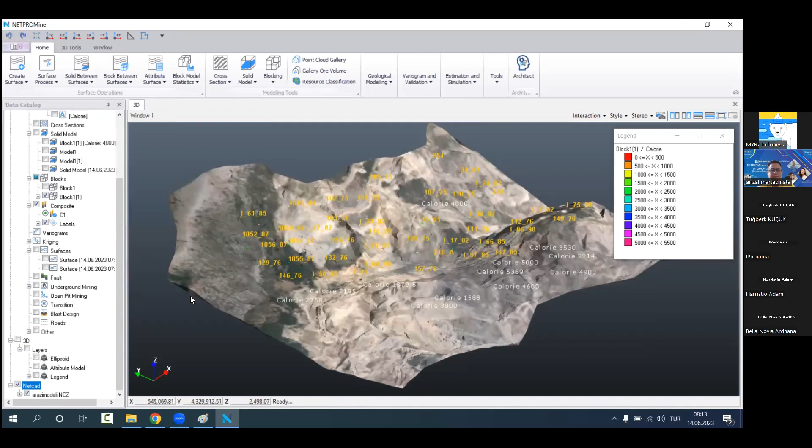One last thing I would like to do, I do have the surface of that coal model because I'm getting questions about that too. So yeah, this is the surface, and let's get that surface into the project. Get a copy.

In this surface that I have, when I imported it, I had a raster image, but you can also drape some rasters onto the surface that you have. If you get a different color when you drape a raster, just go to the style of the surface and make it white. A white surface will show the raster as it is, because in NETPROMine, when we create a surface, we always assign a different color. So this is the thing.

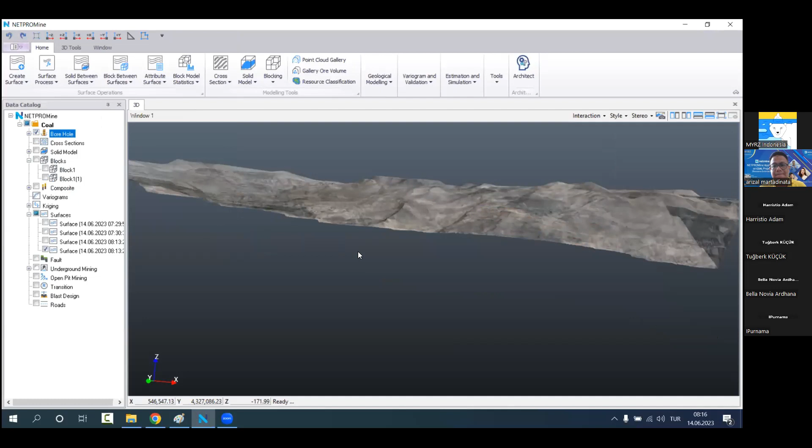Maybe we can make a general optimization and pit design session for that, either coal or metallic project, both together, because the optimization and open pit design parts are a little bit different for both samples, but we might arrange another session. In the meantime, if you have any questions related to that coal sample or the coal project or NETPROMine in general, you can ask me.

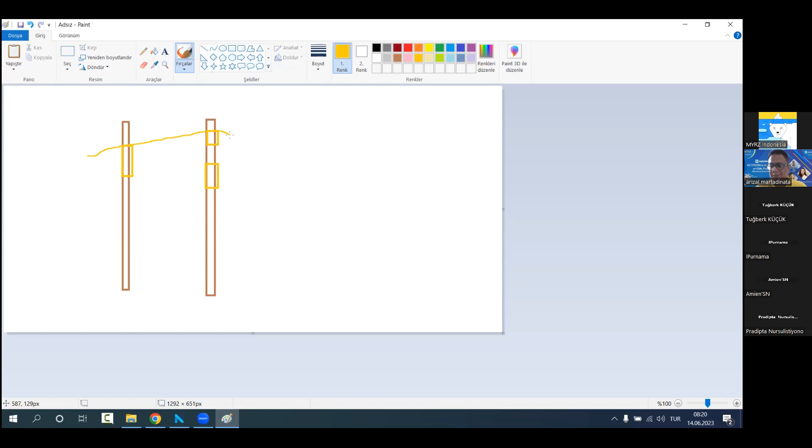Basically, even with small levels, now we would like to aim to create different seam models also. So in NETPROMine at the moment it's not too detailed, but with the stratigraphic modeling we are about to release, it is going to make really good seam models, like lithological models.

It will go through. There are a couple of different things, like you can end seam levels here. Let's say if you don't have any lithology or calorie information in this borehole, you can extend if you want. There are lots of different settings and different rules now we are going to bring, and eventually we will be able to create that type of model.

So when we create that type of model, coal is going to be one of your layers, and we are going to make a really good representation of the seams for the coal. At the moment, I can say we are covering, but not covering all of the parts. With the stratigraphic modeling options, it will cover almost all of the problems in coal or seam modeling.

So the first question was about the cover. Yeah, in some cases we can split the model. What is the minimum coal seam? Well, actually, now there's no limit like that.

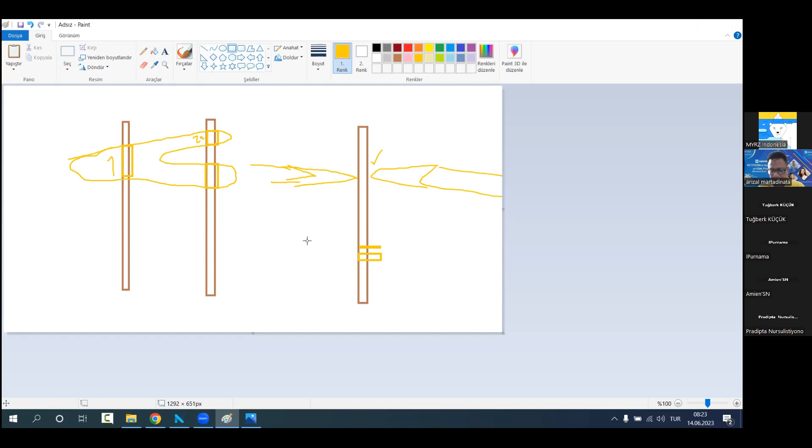Even if you have so little level differences, you can use surfaces like the ones I made here. If we have small level differences, you can also make close surfaces. Or while drawing a cross section, you might want to draw a cross section for each part, or maybe you can combine them, right? Like in this one.

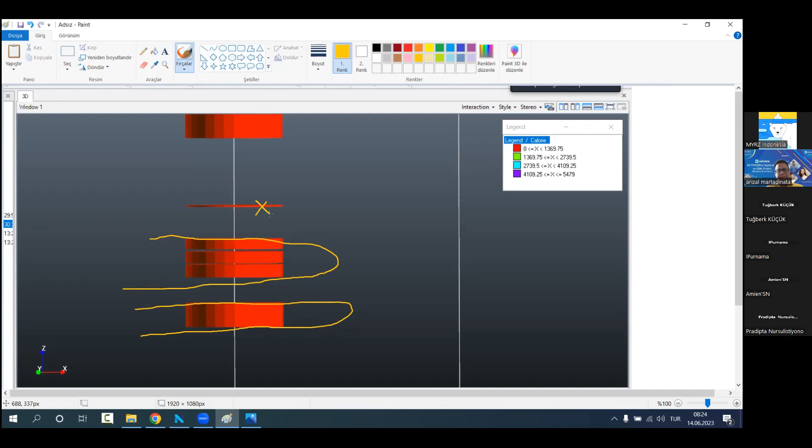Let's take that, like here. When we bring some new features, it is going to ask you whether we would like to model that level, right? And maybe don't want to model this level. So if you say, let's say, lower than 5 centimeter, it's not going to be considered. And if we have less than 5 centimeter difference between two different seams, we are going to combine them, consider them as one. So that kind of option we are going to bring to NETPROMine.

Hopefully in a month or two we can also arrange another webinar session for this, so that I can share those new updates with you. But nowadays, even though we didn't introduce any of the features yet, we are already getting a lot of beautiful results from that package, and we are going to bring that into the market. So hopefully we are also going to release it soon.